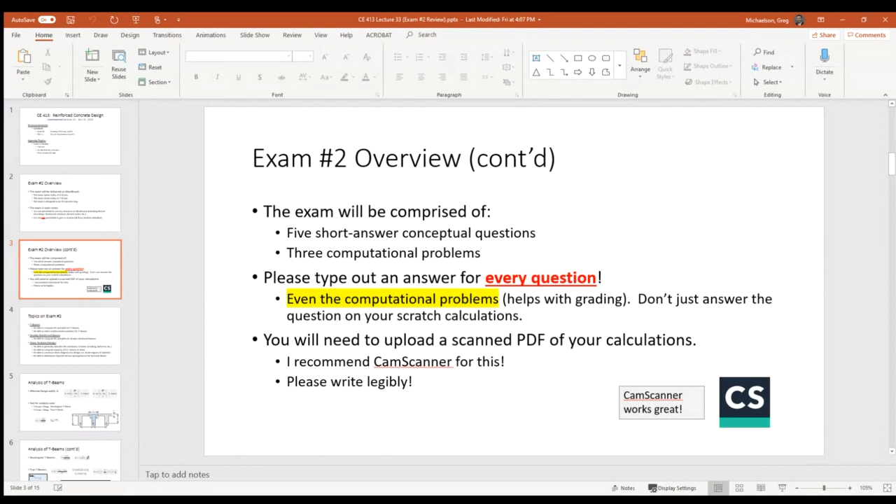Remember, T-beams are known cross-section problems, you don't have to proportion the T-beam, you just have to pick the reinforcement. Same thing with the doubly reinforced section—well, not the same thing, I just want you to analyze doubly reinforced sections.

I don't want you to be able to design them. We never covered design with doubly reinforced sections anyways, and more often than not, it's not something you desperately have to do. So you just need to be able to determine phi Mn and Mn.

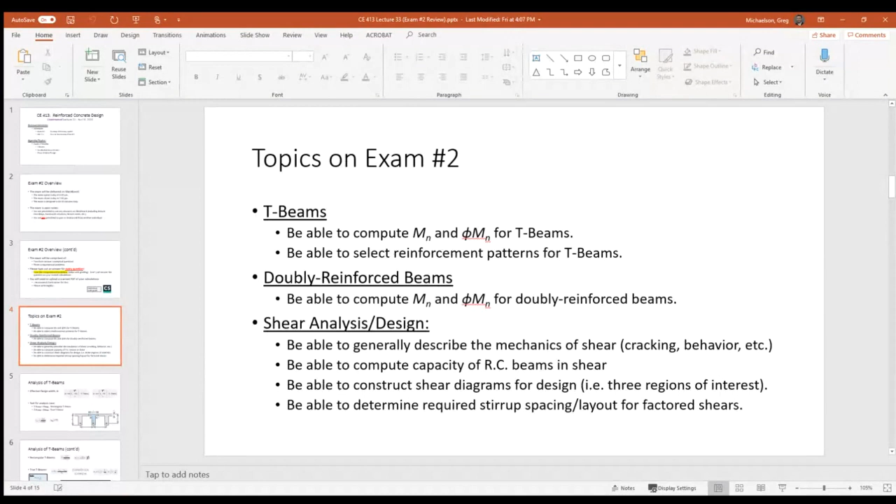Make sure that you can analyze a doubly reinforced section. And as for shear, which is the topic we've done most recently, make sure that you understand shear in general. You can compute the capacity, and you can lay out stirrups and whatnot for beams according to their shear forces.

The rest of the slideshow, I've got a lot of slides, but what I did is I went through all the example problems and put all of the formulas that we sort of derived in class into these slides. I'll take a little bit of time to go through them.

The effective flange width, we have two formulas for whether you're dealing with T-beams in the interior or L-beams if they're on the outside. It's just the minimum of those three quantities. Just make sure that you're cognizant of your units. Beam lengths tend to be in feet, but beam dimensions tend to be in inches. So just make sure that you're using consistent units there.

Remember, with T-beams, we have two different cases that we analyze: whether or not it's a rectangular T-beam or a true T-beam. That's just a function of whether your stress block is completely inside the top flange or if it dips into the web a bit.

Now, if you've got a rectangular T-beam, the analysis is really simple. It's just As Fy, D minus A over 2, to get your moment capacity. And A is the depth of the stress block, same formula as before. The big thing with rectangular T-beams is your B is the effective flange width, B for the top flange.

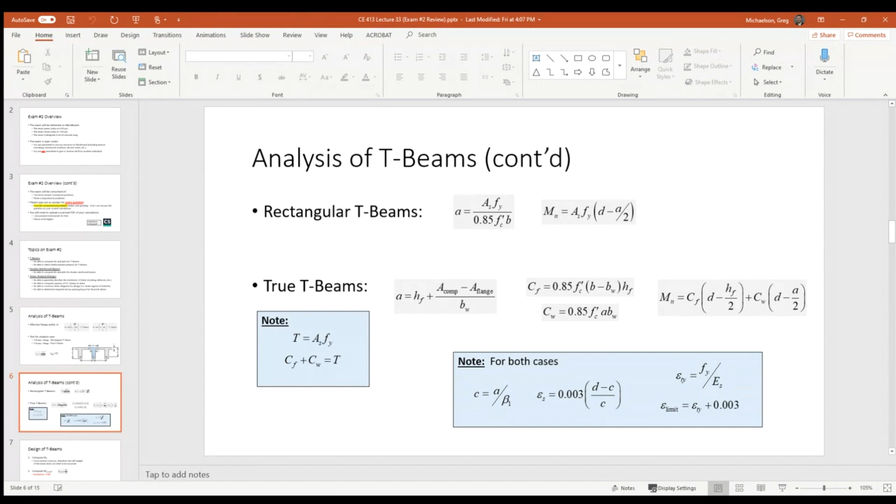For both cases, don't forget we have to determine what phi is, and the way that you determine that is you look at your C value, A over beta 1. You then compute your strain in the steel, 0.003 times D minus C over C, and then compare that against your limiting strain, which is the yielding strain plus 0.003. If the strain in the steel is larger than the limit, then A, your beam meets ACI requirements, and B, it also means phi equals 0.9.

Designing T-beams, these come straight from our previous notes. The first thing we do is compute Mu, the factored moment. Sometimes it may be given to us—we had problems in class where Mu was just given. Sometimes we have to compute it. Remember, we don't have to make any assumptions with Mu because this is a known cross-section problem, so you don't need to assume the self-weight of the beam because you already know what the beam looks like.

You do need to compute Mn required. You have to assume that phi equals 0.9, and you have to assume a rectangular T-beam to begin.

When you design a T-beam, you start off assuming that the beam is rectangular, and you compute the reinforcement ratio assuming it's rectangular, and then using that reinforcement ratio in step 4, you back calculate what A would be if you put that much reinforcement in the beam.

So step 3, you assume it's a rectangular T-beam. Step 4, you immediately test that assumption. If it is a rectangular T-beam, then A will be less than or equal to H sub F, so the stress block depth will be less than the flange thickness, and you can go straight to step 5. If not, that assumption was invalid, and it's a true T-beam, and you go to step 8.

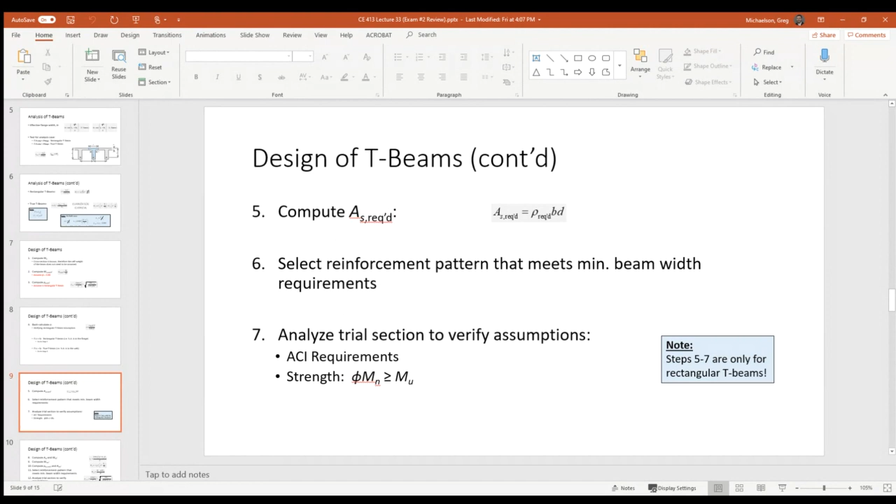Step 5 is really simple. AS is rho BD, select a reinforcement pattern, analyze it. It's that simple. If it's a true T-beam, the analysis becomes a tad more involved.

You have to split it up into your web couple and your flange couple. The first thing you do is figure out the amount of steel required for the flange steel couple, and then the moment capacity of the flange steel couple. Then, if I know the capacity of the flange steel couple, I figure out how much capacity in the web steel couple I need in order to safely resist that load, figure out how much reinforcement you need there, and select a reinforcement pattern based off both ASF plus ASW.

Again, these steps are only required if it's a true T-beam. And again, this is no different than anything we had in our previous notes, I just fit everything into one section.

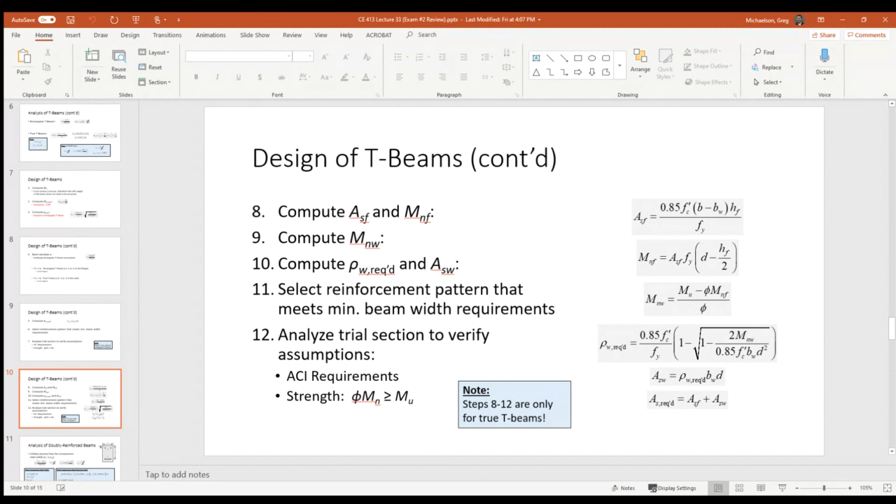When you're analyzing a doubly reinforced beam, the first thing you do is assume that the compression steel yields, meaning the strain is larger than the strain at yielding. You determine what A would be, what the depth of the stress block would be if that were the case, what C would be, and what the strain in the steel would be if that were the case.

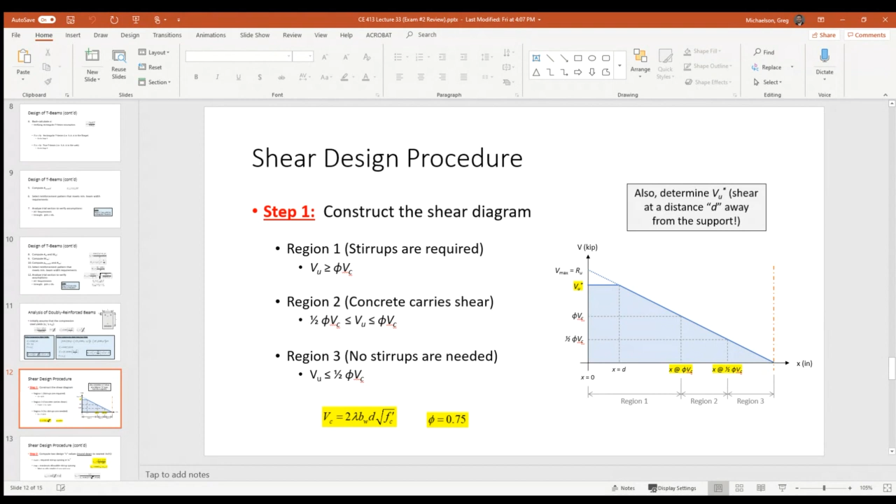We then compute 2 S values for design. Remember, we always round those down to the nearest inch. So if you calculate 5.3, you don't round that up to 6 inches, you round it down to 5 inches. Round down to the nearest inch.

We have our required stirrup spacing at VU star, and then our maximum allowable stirrup spacing. We always compute those 2 values. S max 1 is the minimum of D over 2 or 24 inches, and S max 2 is calculated using that formula there. Now again, it's possible that S max is smaller than S required, and if that happens, just use S max. It just indicates that the beam doesn't have a lot of load on it.

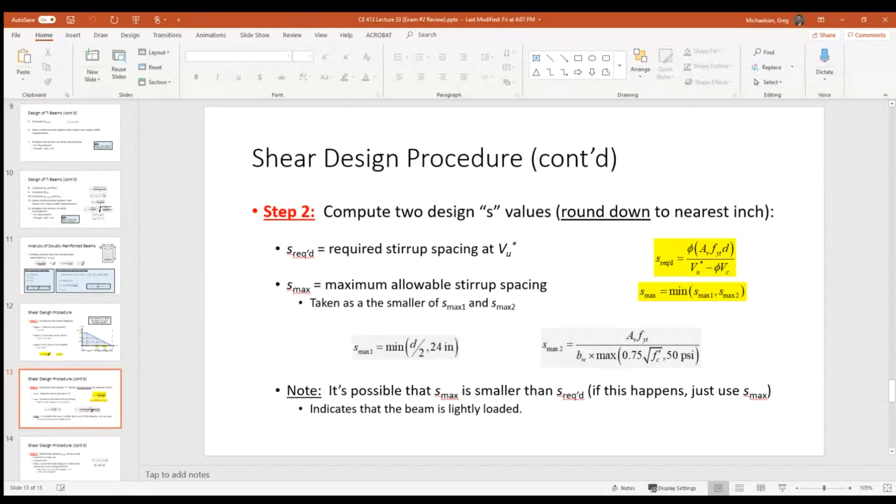It's very lightly loaded. For the procedure for moving on, if you have 2 values of S required and S max, again, this is only valid if S required is smaller. So if you have like an S required of 4 inches and an S max of 10 inches or something like that, we have to determine where we can start using S max. We know we're going to use S required at the beginning, so where can we start using S max?

So using that S max, we compute a VS and then a phi VN, and then we go back to the shear diagram and figure out where that is on the shear diagram. It should occur in regions 1 or 2, most likely in region 1, but hopefully like right before region 2.

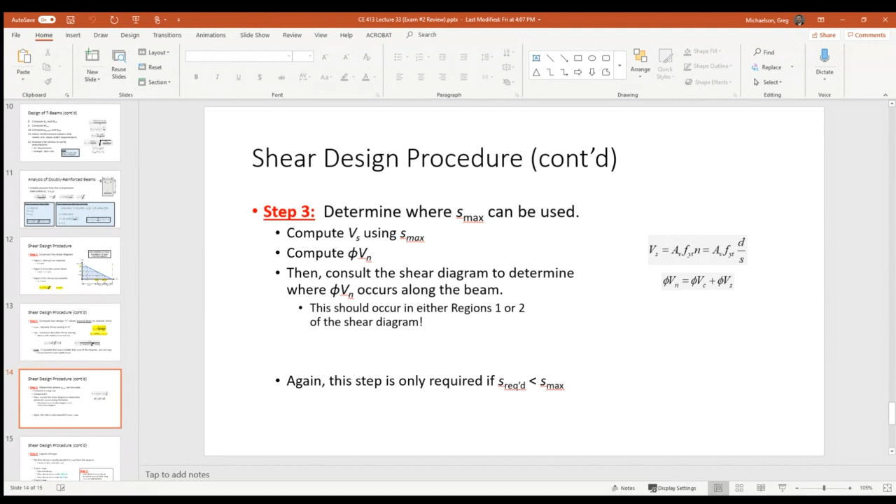Lastly, we lay out the stirrups, and I think this is probably one of the parts where everybody seemed to understand well. You might have had challenges finding the individual distances or the individual values, but the actual laying out part seems like everybody did very well on.

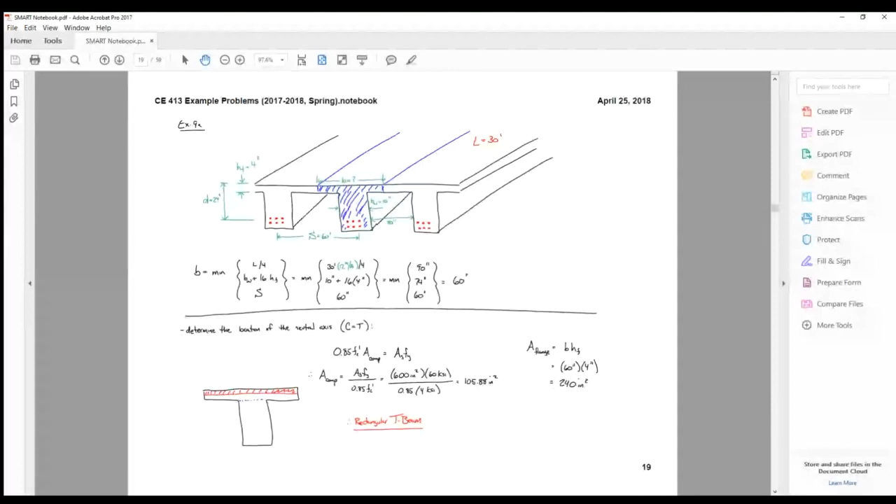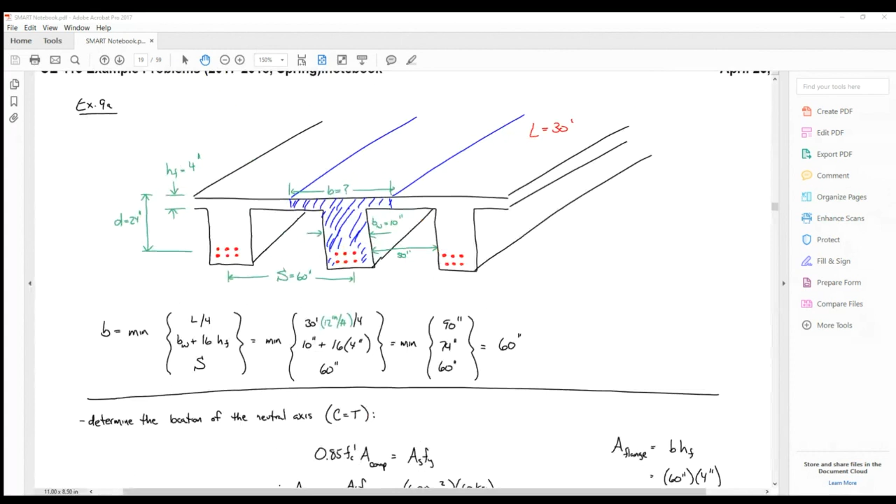Does everybody see example 9A? Okay, all right. So this was a problem that we did in class. This was an analysis problem. So the purpose of the problem was just to do the calculations to determine the capacity, phi MN.

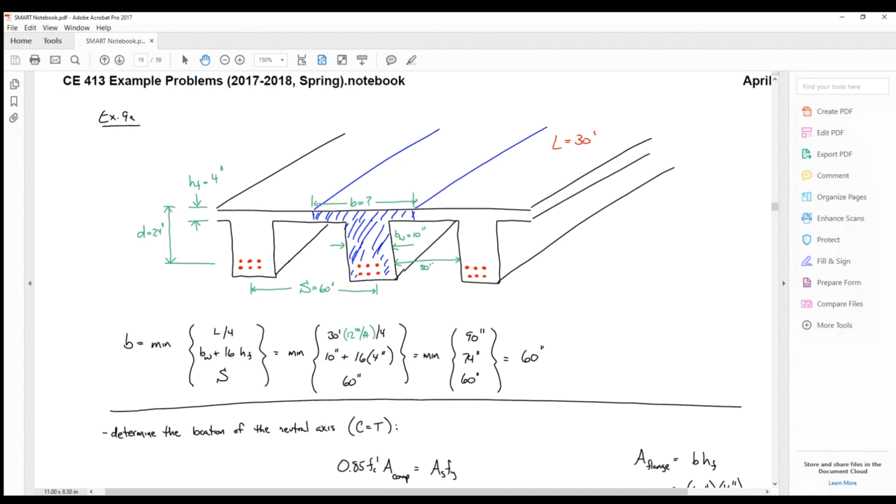So if you look here, here's the T-beam. Part of the purpose of this exercise was to just go through the notation. So it had a flange height of 4 inches, D value, so D was 24.

I'm going to use my cursor to sort of highlight stuff. The girder spacing was 5 feet, or 60 inches. I believe in the problem you were told it had a clear web spacing of 50 inches, so you had to figure out what that value was.

The web width was 10 inches, and so the first thing you have to do is figure out that slice of the segment you can cut out to turn it into a T-beam. So you have to figure out that width, that effective flange width. To do that, first off, plug and chug.

We take the minimum of L over 4, BW plus 16 times HF, or the girder spacing. Now, this is what I was saying, be careful on your units, because the beam length, this was a 30-foot long beam. So this is 30 feet, but all of these dimensions here, like this one and this one, they're in inches.

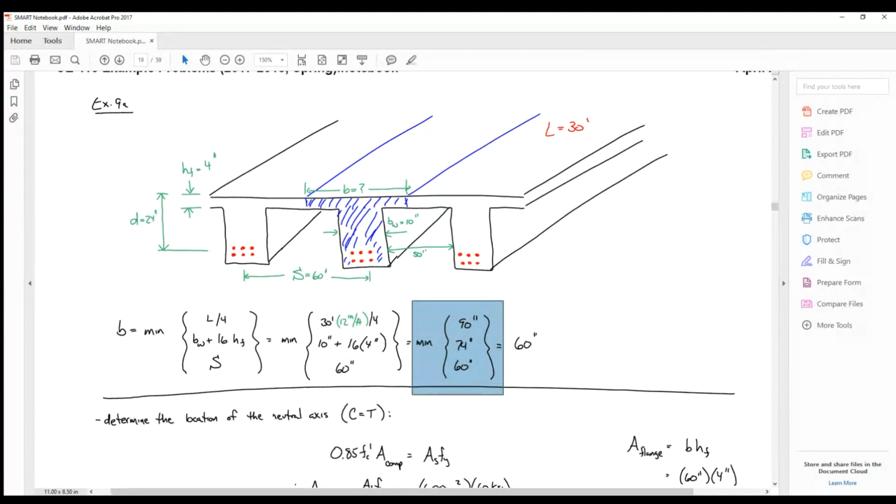So you have to make sure that you're being consistent. Now, when it was all said and done, we had a minimum of these 3 quantities. So the minimum is obviously 60 inches. And then we get to right here.

And this is sort of going to Victoria's question. So we need to determine the location of the neutral axis, and that's what I mean by determining whether or not it's a rectangular T-beam or a true T-beam. It involves computing 2 values: the area in compression and the area of the flange.

Let's take each one of those one at a time. The area of the flange, that's simple, it's just B times H, the total area. So this flange was 60 inches wide, 4 inches tall, so it has an area of 240 square inches.

The area in compression, that's a little bit more involved. Remember, what you're trying to do is determine the depth of the stress block, or the size of the stress block, I guess I should say, which is that magic value such that compression equals tension. So let's start off looking at this expression here.

Compression equals tension. What's the tension? Well, we have tensile rebar in the bottom, so it's just the area of the steel times Fy. So that's the tensile force. The compressive force, remember, we always assume that the stress block has a uniform stress of 0.85 FC prime.

So we have to determine the area of that stress block. We don't know what shape it is, we just need to know the area. Now the area, I solve for this, I just divide both sides by 0.85 FC prime, and I get ASFY over 0.85 FC prime. So if you plug and chug, you get...

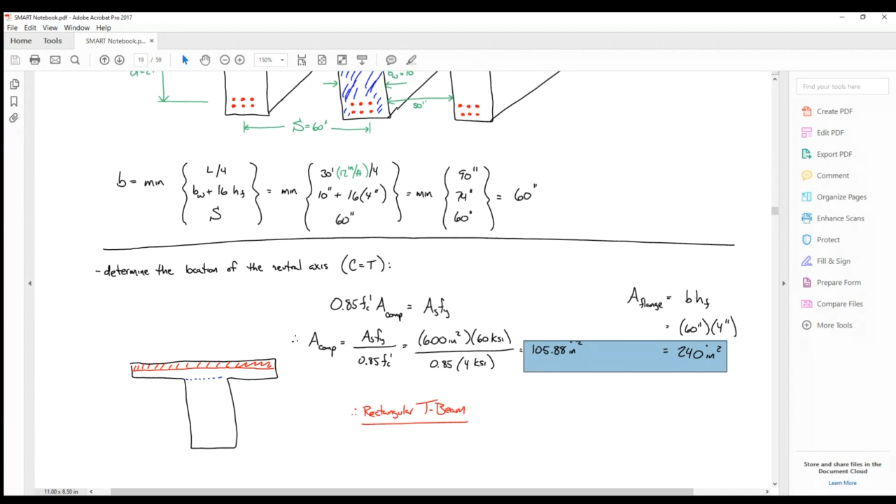The area in compression is about 105.8, 106. So the question is, can I fit the stress block completely inside the flange? And the answer is yes, you can. It's going to look something like this image on the left.

You can see that red hatched region, that's the stress block, and it fits completely inside the flange. So because of that, what does the stress block look like? It looks like a rectangle, so it's a rectangular T-beam.

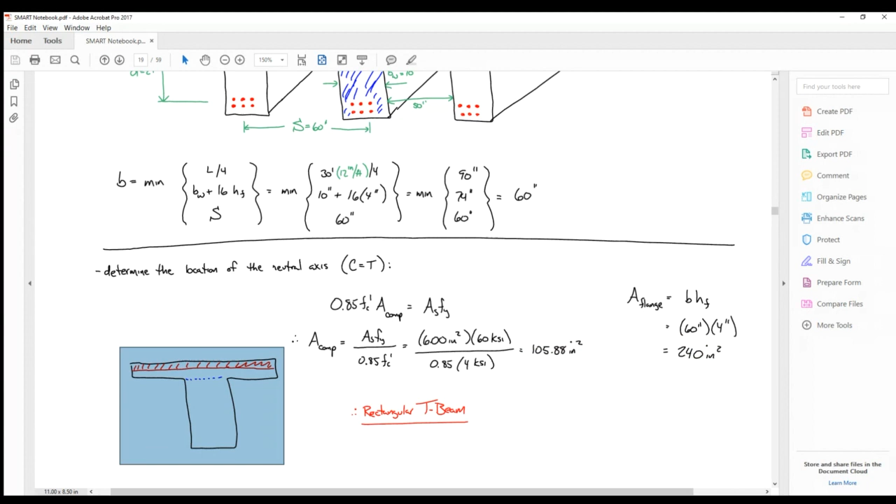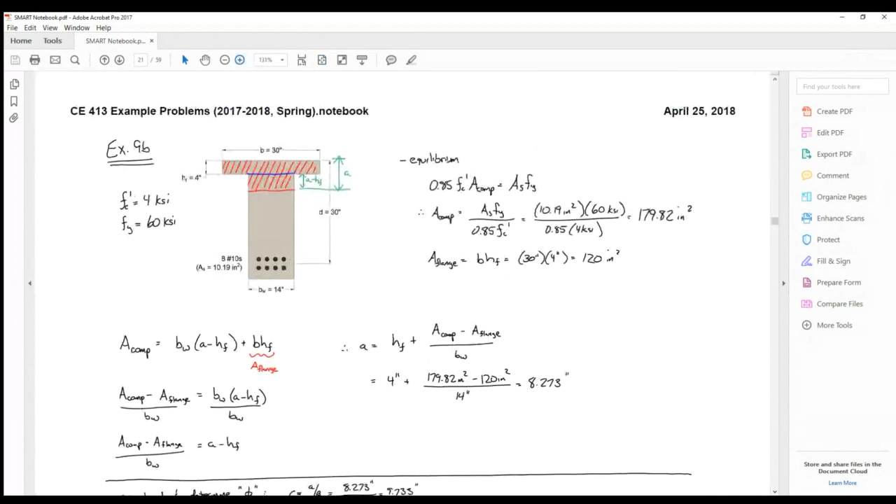Now if you go to a future example, example 9B, you do the exact same calculation. Although here you end up getting a different answer, or a different comparison.

This is example 9B again, trying to do an analysis and look at the two values. We have the area in compression. We do the same math, and it ends up being 179.82 square inches, and then the area of the flange ends up being 120.

So here it's a little different. The flange isn't big enough to completely contain the stress block. So the stress block has to go into the web a little bit. If you look at that red hatched region, the stress block is a T shape.

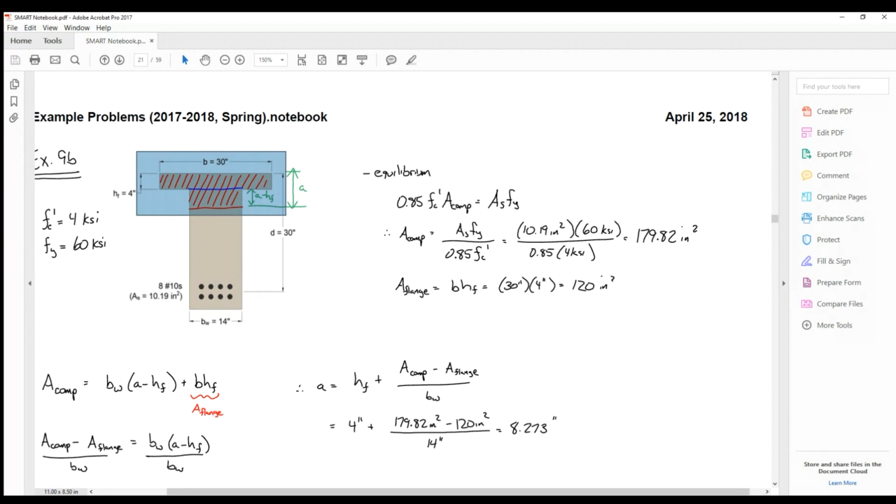It's a true T-beam, because the stress block looks like a T. Okay, so that's how you determine the difference between whether or not it's a true T-beam or a rectangular T-beam from an analysis standpoint. From a design standpoint, it goes basically to right here.

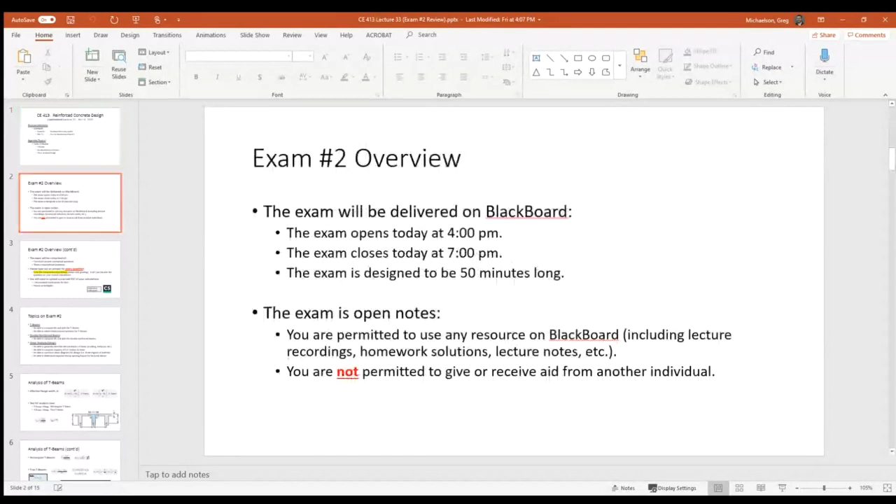So for design, whether or not you're dealing with a rectangular T-beam or a true T-beam is determined in steps 3 and 4. In design, you know what the T-beam looks like, the physical dimensions of the beam. You just don't know whether to analyze it as a rectangular T-beam or a true T-beam, and you certainly don't know that because you don't have any reinforcement.

There's no rebar because you have to figure that out. So you start off by computing MU, and then you figure out how much MN is required, the strength of the beam required, assuming phi equals 0.9. Then you get into the guts of your design, starting off assuming it's a rectangular T-beam.

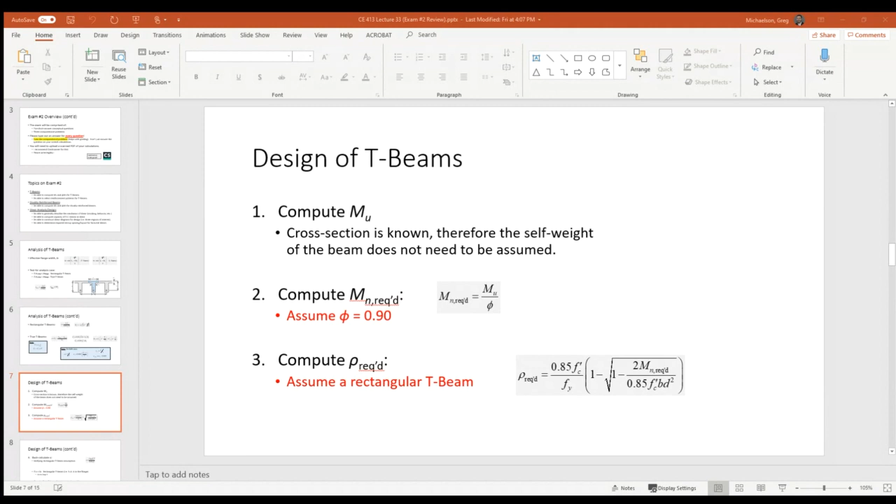In step 4, we immediately verify that assumption. We ask, what if we took that much reinforcement and put it in the beam? Step 3 tells us how much reinforcement we need if it's rectangular. Step 4 says let's put that much reinforcement in the beam and ask, is it rectangular or not? So we back-calculate A, trying to verify that assumption.

Now remember, what is A? A is the depth of the stress block. So if A is less than the thickness of the flange, it's rectangular. If it's greater than the thickness of the flange, then it's a true T-beam. That's how you figure it out in design.

I know that was a little bit of a long-winded answer, but I wanted to make sure I was clear. Did that answer your question, Victoria?

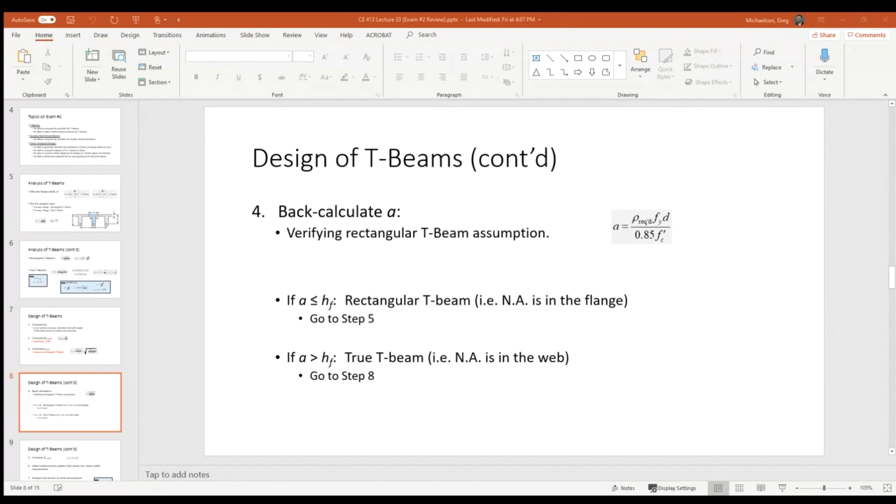Does the L-beam you mentioned differ from the T-beam other than B? No, the only thing that's different is the formula for B. Everything else is completely the same - the analysis protocol, the design method, every step, nothing changes. Just that formula.

And again, it's just because it's the beams on the outside. It doesn't change the fact that it is a beam with a flange on top of it. It's just that the flange has different dimensions.

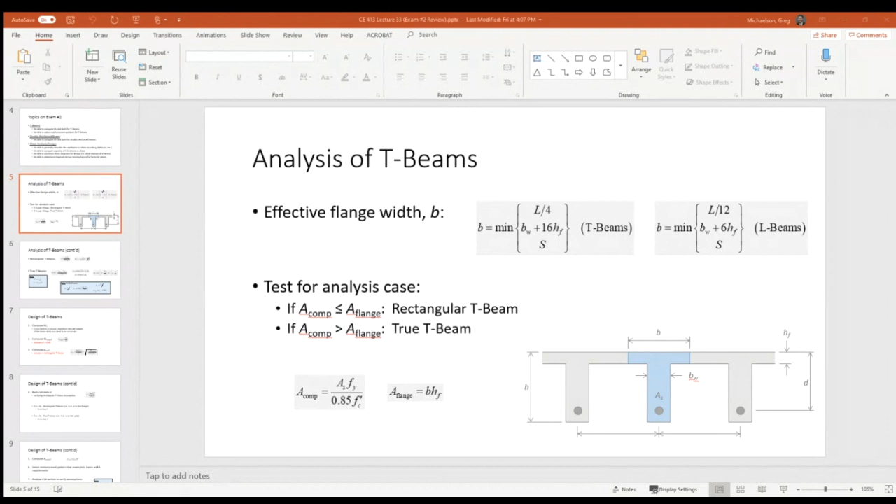All right, so here's the example. These calcs are from a couple years ago, but the math really hasn't changed all that much. In fact, I don't think it's changed at all. So we had a beam with a uniformly distributed load.

It has 4 KSI concrete, 60 KSI steel. It's 16 inches wide, 25 inches effective depth. This beam had a lot of load on it: 11.5 kips per foot distributed load. I mean, that's a lot, that's 11,500 pounds every foot. It also was 20 foot long.

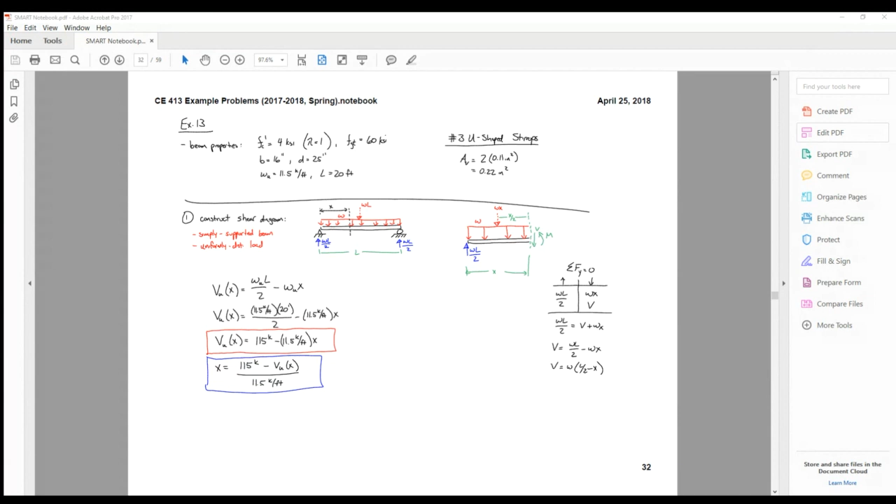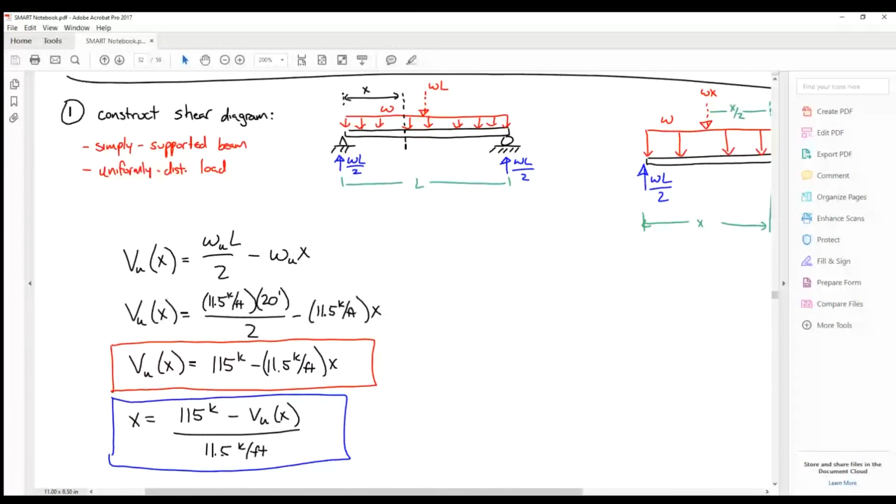Now, first thing I have here in the slides, again, I wouldn't totally require you to do this on the exam, but this is something that should be within your abilities. So it's a distributed load, so the reactions are WL over 2.

You cut a section, look to the left. So you can see I cut a section right here, and then I look to the left. So if you cut a section and look to the left, that looks like this right here.

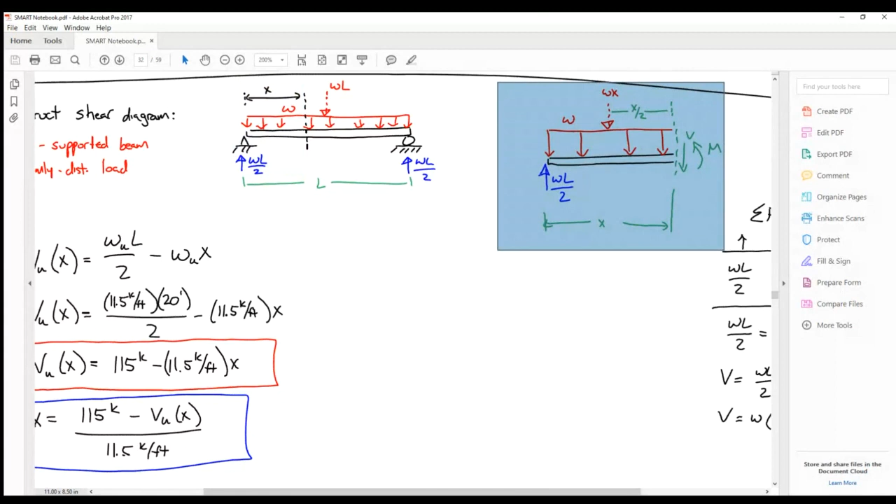And then if you sum forces vertically, what do you have? You have WL over 2 going up, and then what do you have going down? You have WX going down, and you have V going down. So WL over 2 going up, WX and V going down.

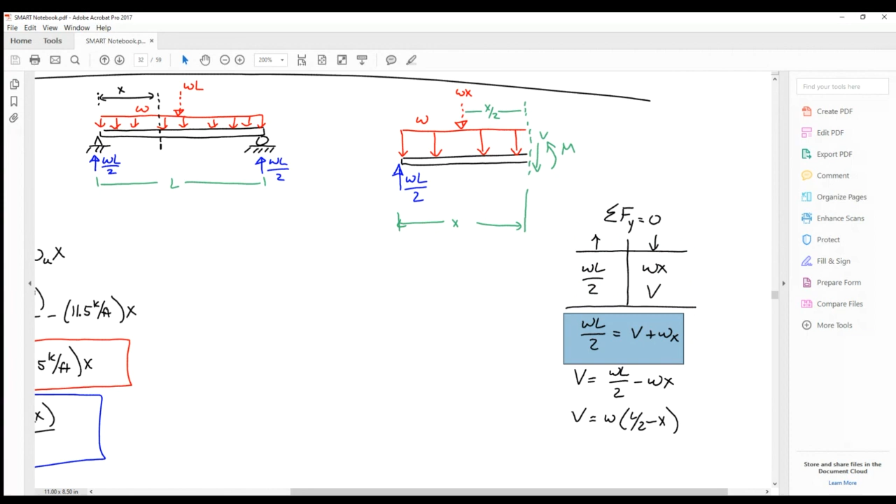So this is your expression, solve for V, and here's what you get. So this equation for shear and this equation right here are the exact same, it's just plugging the values in. So this, WL over 2 is 115 kips, and then W was that. And so those are your two expressions for the shear diagram.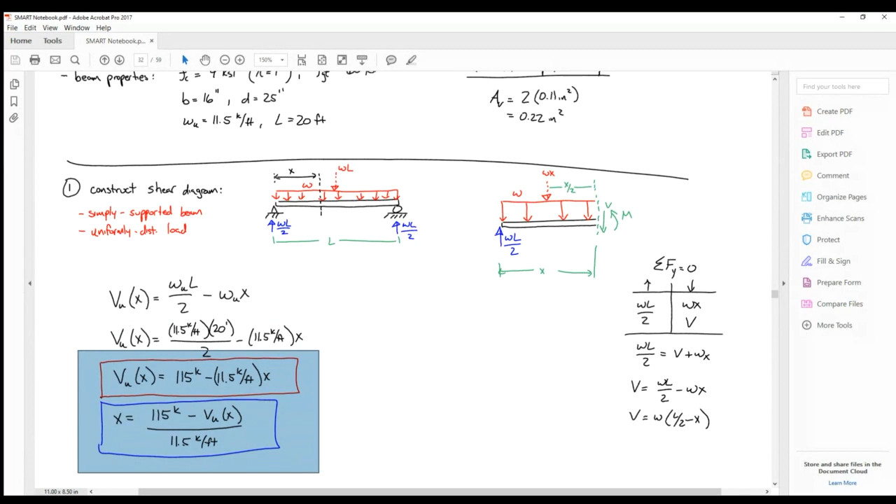In order to plot the shear diagram, we can draw a quick and dirty one pretty easily, but we need 3 values for the plot. We need VU star, we need X at PVC, and we need X at half of PVC. And so Vc is 2 lambda...

BD square root of FC prime. Remember, square root of FC prime, you put in PSI, you get out PSI. And so this comes out to be about 51,000 pounds, or 51 kips.

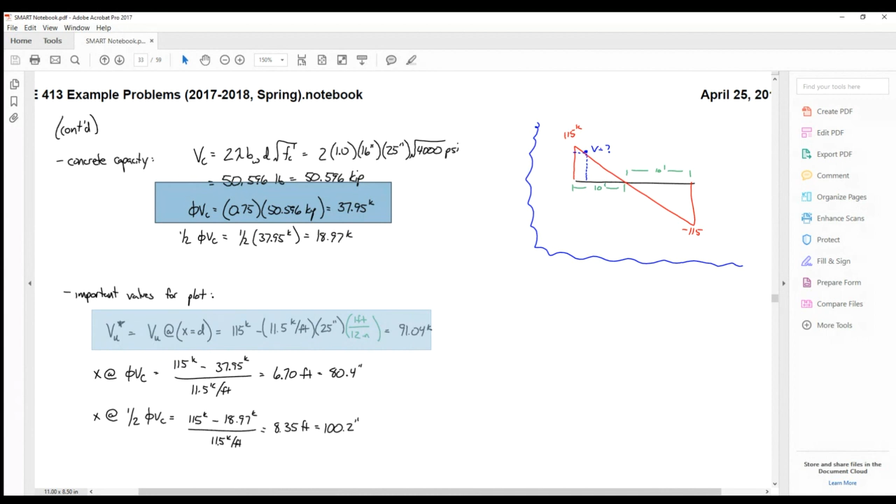phi Vc is 0.75 times that, and then half of phi Vc, take half of that. VU star, that's the VU at X equals D, so plug in D in the expression before. Don't forget to convert that to feet to make sure that your units are consistent. And then X at phi Vc and half of phi Vc, respectively.

So this is your shear diagram. You can see we have this linear region, so you can see how it trails down like a line. That's just your raw shear diagram. Remember though, our shear diagram starts at VU star for design, so that was like 91 kips.

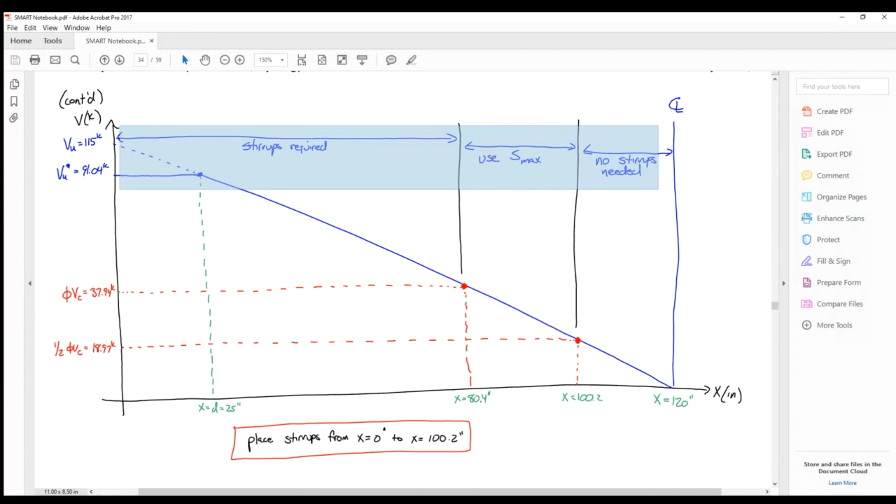We need, stirrups are required everywhere between the support and phi Vc. That's region 1. Region 2 goes to half of phi Vc, and region 3 is out to the end. So this is the region where we require stirrups, this is the region where we should be using S max, and this is no stirrups at all.

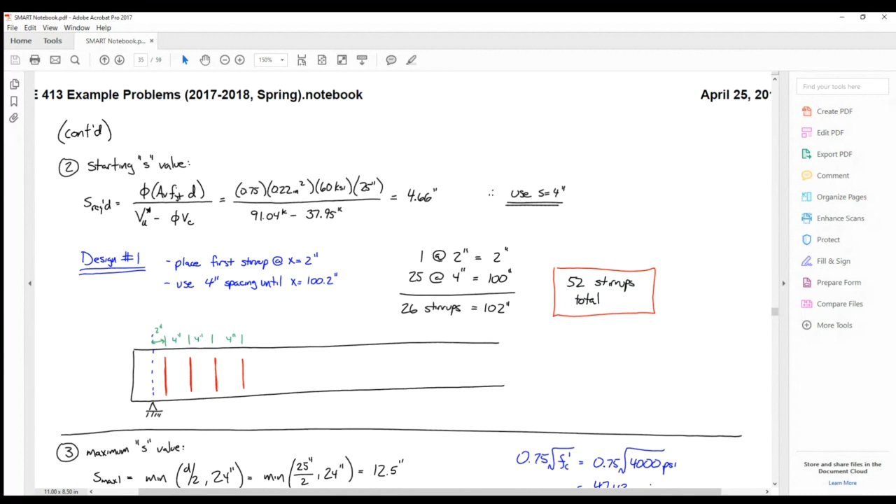Next, now I formatted my steps a little bit differently here, so bear with me. When I was doing the calcs a couple years ago, I went through and demonstrated how with more increments of stirrup spacing, you were able to decrease the number of stirrups. So you can sort of ignore this part here, this design 1, I won't make you do that in class.

Really, for our purposes, what you need are 2 S values. You need an S value that's required at VU star, which ends up being 4 inches. Again, you compute 4.66, you round that down. Remember, whenever you compute an S value, you round it down, not up.

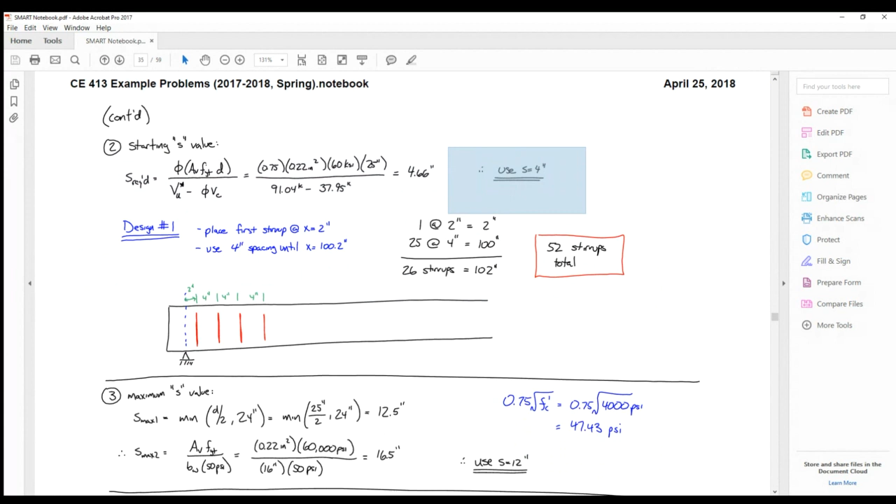Next, we need a maximum S value, so S max 1 and S max 2, plug and chug, and this is the S value that we get, which is 12.5 inches, but again you round that down. So you have an S of 4 inches and an S of 12 inches.

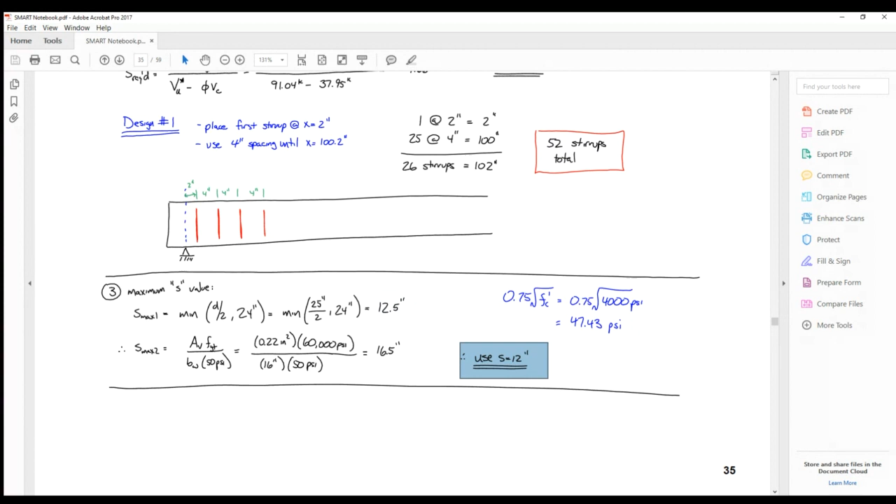Next, you determine where you can start using S is 12 inches, so start off with VS. VS gives you 27.5 kips, assuming that S is 12 inches. phi Vn is 58.6 kips, and so where does that occur on the shear diagram?

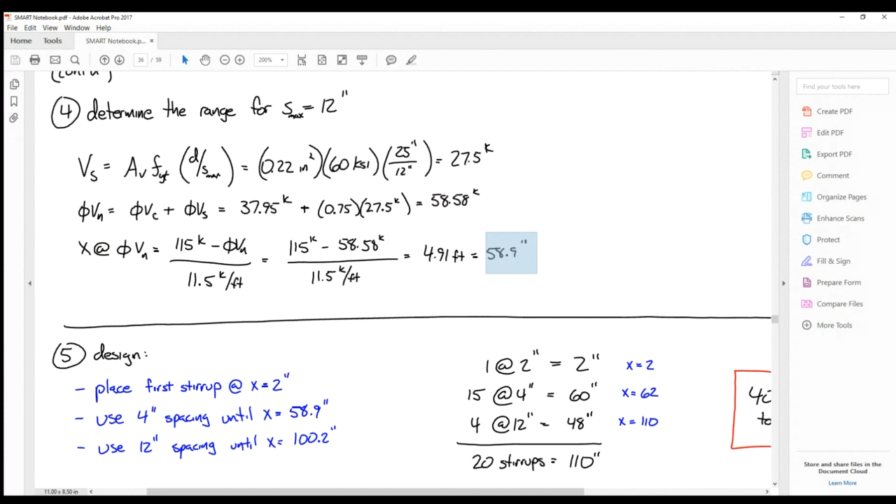It occurs at around 4.91 feet or 58.9 inches. So what do we place? Our first stirrup at X equals 2 inches. We use 4-inch spacing until we get to right here, and then we use 12-inch spacing. We get to half of phi Vc, and so that would be our answer.

That's really all I'm expecting of you for this exam and really for this class. The only thing I do in class to improve on this is, if you look at the example, we're really only using 2 increments: 4 inches and 12 inches. Well, what if I threw something in the middle, like 6 inches? See how I've got 20 stirrups on the beam, or 40 stirrups total? Instead of 40 stirrups total, maybe if I threw another increment in between, I could reduce the number of stirrups.

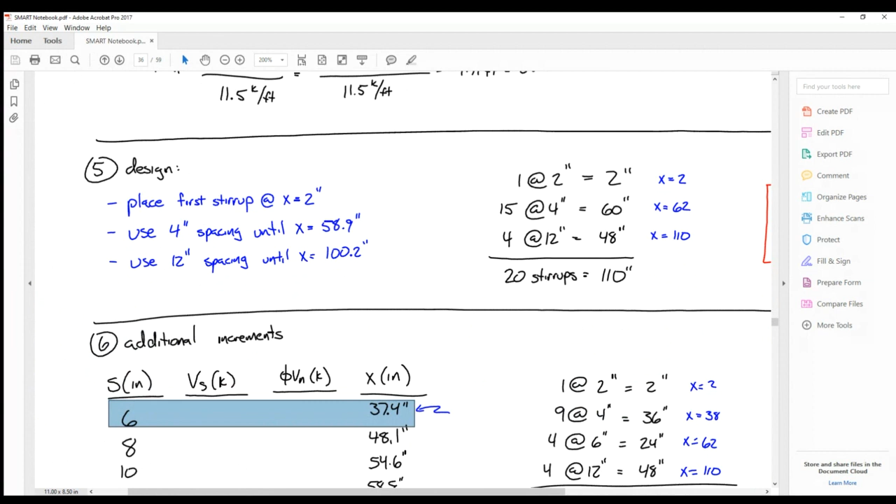So what I did in class is I said, well, what if I tried S equals 6 inches? And if I use S equals 6 inches, I repeat what I do in step 3, and I end up getting that value of 37.4. So I do it again, and I'm able to shave off a couple stirrups. Again, to be absolutely crystal clear, I'm not going to make you all do that on the exam. I just want to show you that's what we did here.

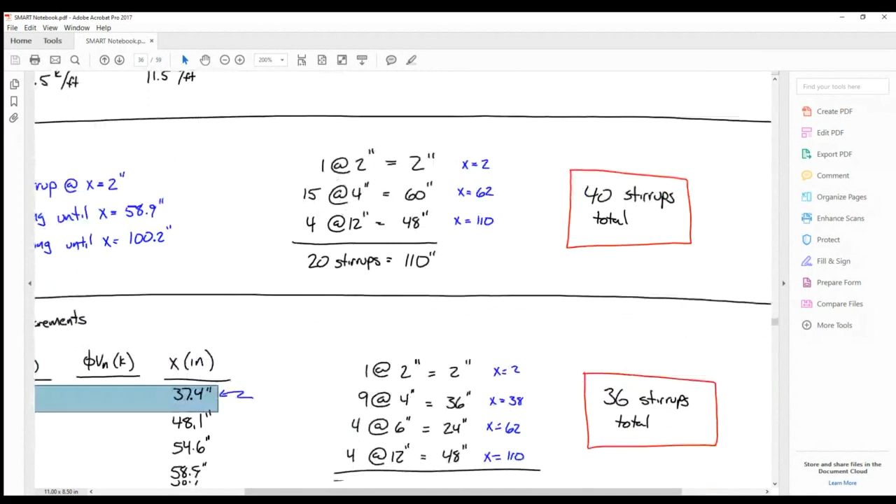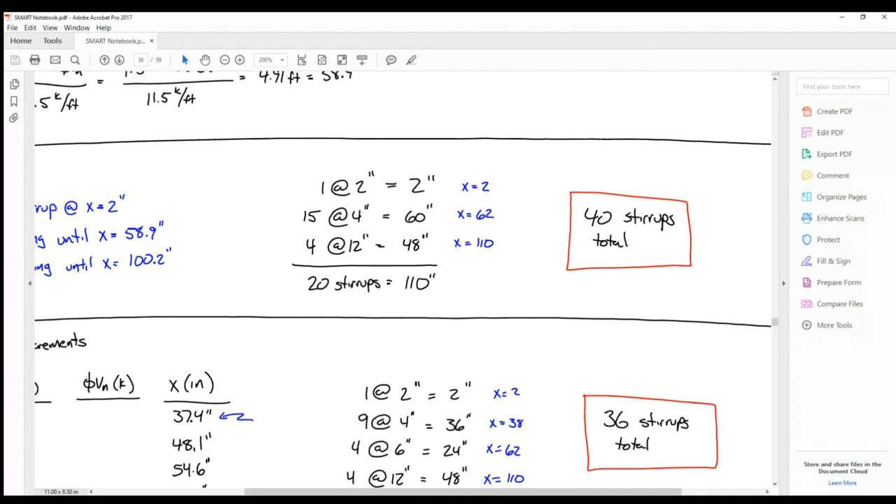I'm going to be honest with you, I don't remember if we did this in class a couple weeks ago with canceling lectures. I don't know, I don't remember. So that's why when we came back after break, I said let's just do another distributed load example to make sure we're on the same page. Again, that right there is where I expect you to stop.

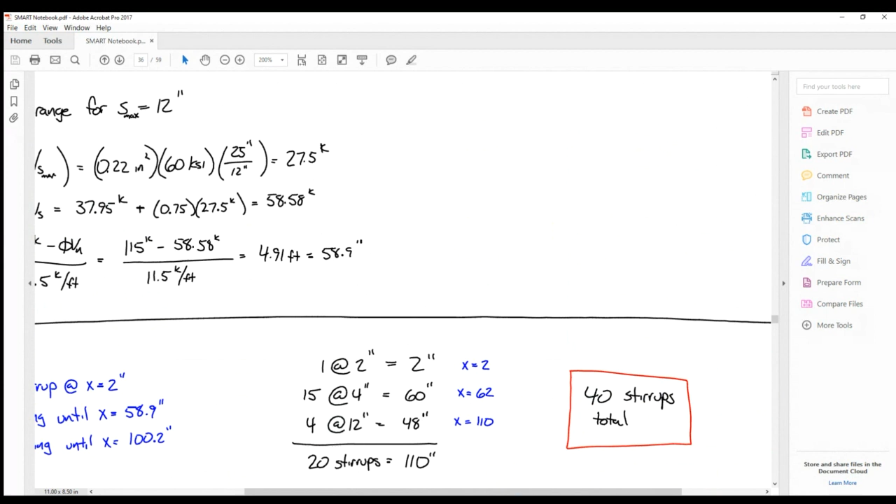Now, did I cover what you wanted, or was there anything specific? Why do we round down S values? Okay, great question, why do we round down S values? The reason why we round down S values is because of this equation right here.

Okay, so let's take a look at this equation. This equation tells you the shear capacity provided by the stirrups. Remember, how does a reinforced concrete beam resist shear? Well, it resists shear 2 ways: the shear capacity provided by the concrete, the VC, the 2 lambda BD square root of FC prime, and then the capacity provided by the stirrups. That's why you're putting stirrups in the beam, because you need stirrups, since the concrete beam isn't enough. Now here's the expression.

How do you compute VS? You take AV times FY times the quantity D divided by S. So S is in the denominator, keep that in mind. Now, let's say you do some math and you find that a beam needs a stirrup spacing of 5.3 inches. So let's say that you compute S equals 5.3.

If you round that up to S equals 6 inches, what happens here? If you have an S of 5.3 and you round it up to S equals 6 inches, what happens to your VS value? VS goes down, right? Higher denominator equals lower VS, which equals lower capacity. So the conservative thing to do, and what makes sense from a capacity standpoint, is to take that S value and round it down. That's one way of looking at it, is to look at the math, but let's also look at the physics of it.

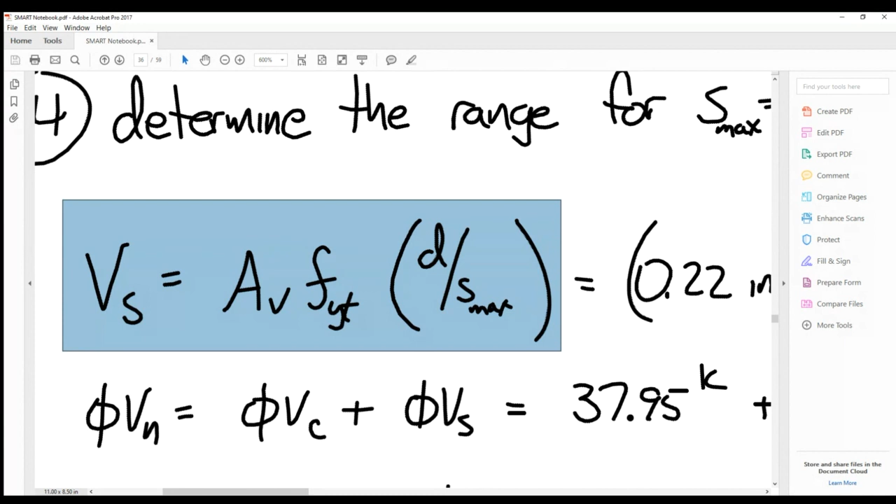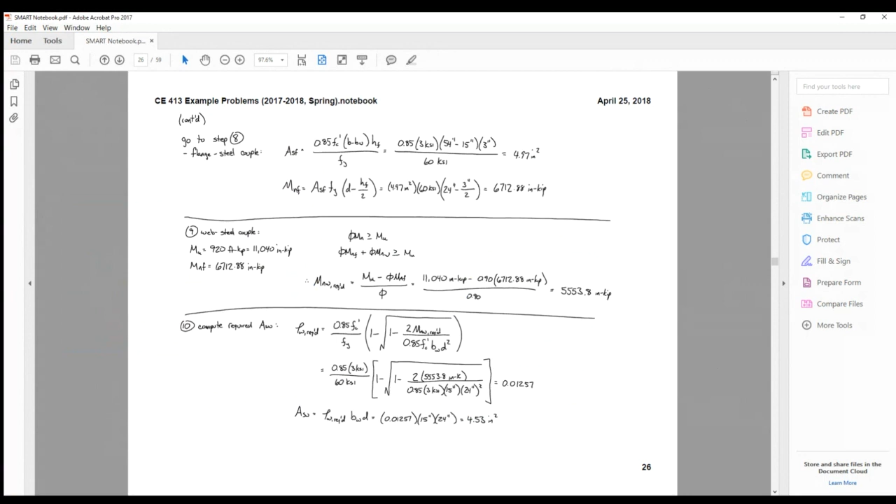Can we quickly review laying out stirrups? Are you talking about... Oh, my screen froze, hold on. Are you talking about this part right here? Like assuming that this was correct, that this is what we needed? Like you can get to this part, and then it's like, okay, get from this part to this part.

Let me try something. All right, so give me 1 second.

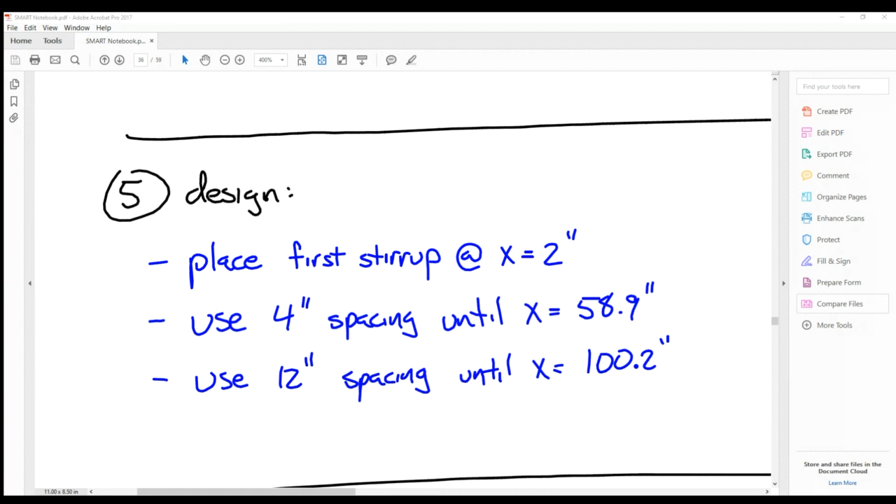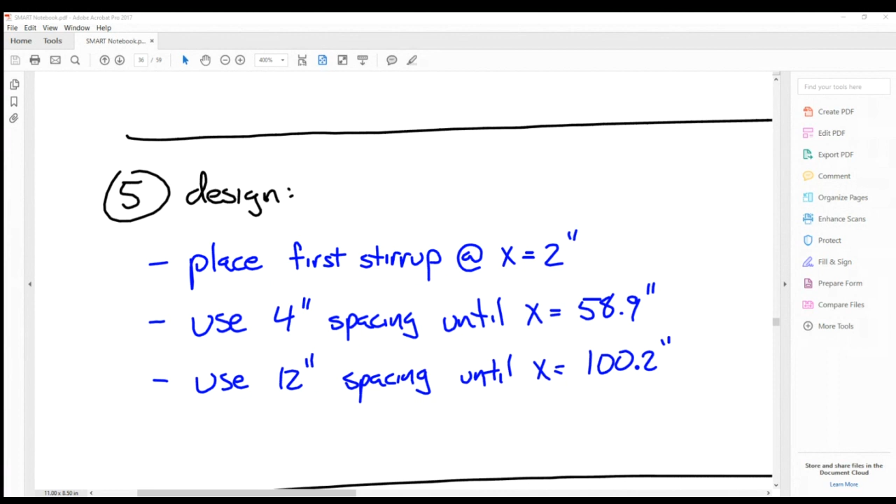While I'm getting ready for this, let me see if I could walk and chew gum, so if you need me to answer another question. Hold on. Stop sharing.

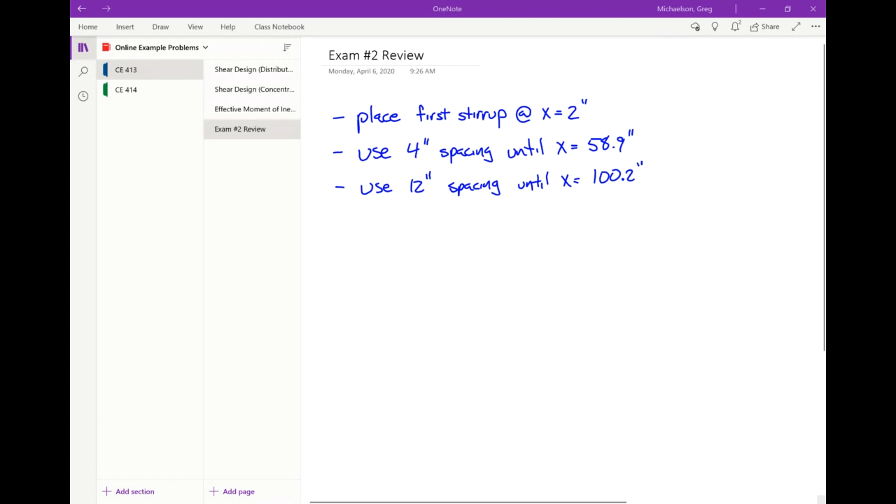Okay, so you're talking about going from this to a layout, am I correct? And if you need to turn on your audio, that's fine. So let me show you how this works, okay? Now, hold on.

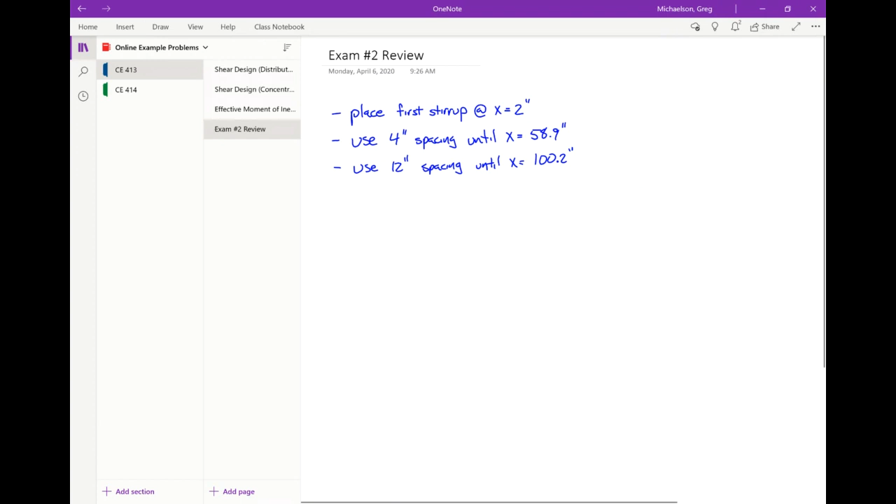Okay, so here's the beam, right? So we place our first stirrup at x equals 2. To be clear, at the support, this is x equals 0. So what I'm going to do is place my first stirrup here. So I've got my first stirrup, and that is

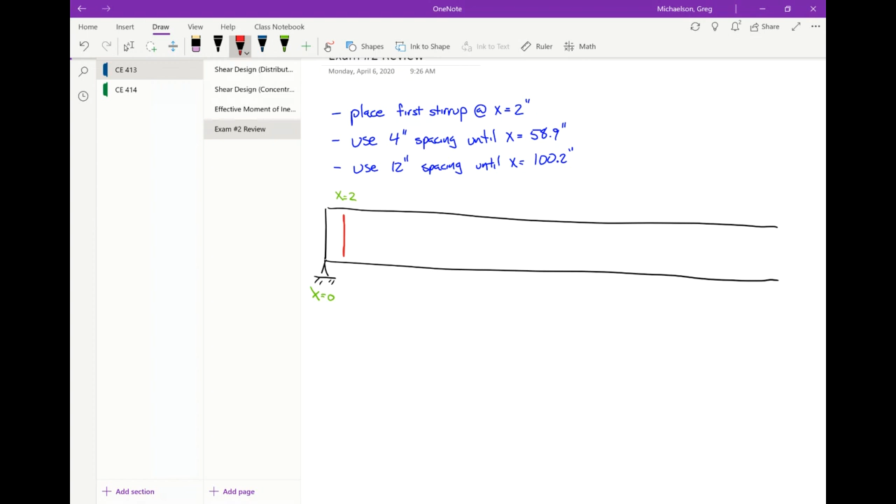at x equals 2, okay? Now what I'm going to do is start placing stirrups at 4 inches. Let me just sort of draw that out. 1, 2, 3, 6. Okay, all right. I'll just draw a few of them to kind of explain. Just think of this like it's a graph, like you're graphing values.

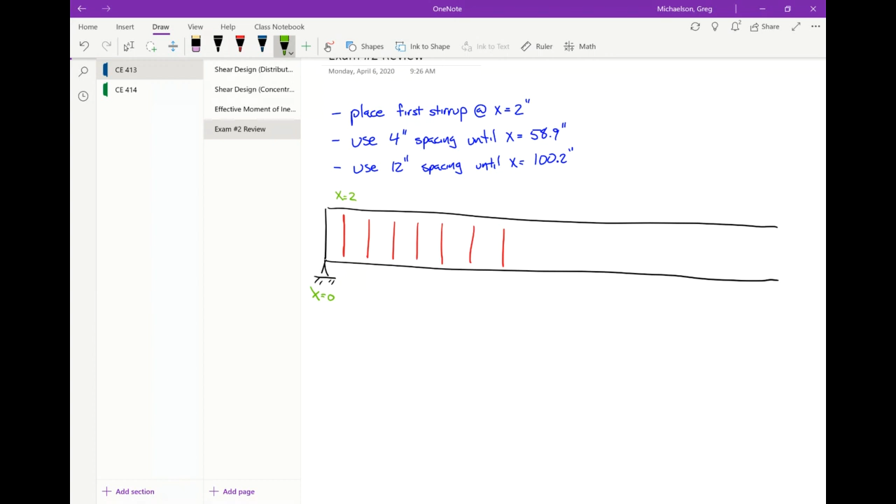Okay, so this is x equals 2. So if I put my first stirrup down, again, I'm using 4-inch spacing. So if I'm at 2 inches and I go out 4 inches, that's x equals 6. And so this one's going to be x equals 6 plus 4, which is 10. This is x equals 14, 18, 22, 26. Follow me so far?

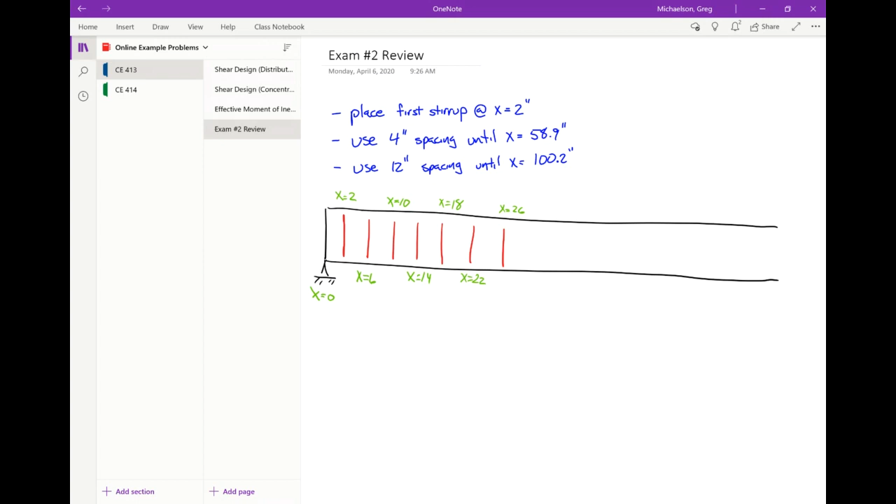You follow me so far, Isaiah? Okay. All right. So let me put this in a table so that we're clear on this. So using 4-inch spacing.

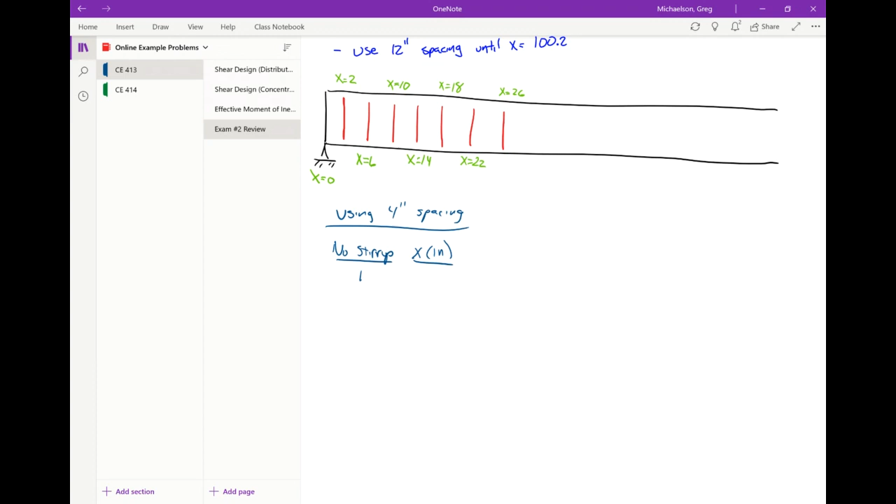Would you agree that the first stirrup got me to 6 inches? The second stirrup got me to 10 inches. Third got me to 14. 4 got me to 18. 5 got me to 22. 6 got me to 26. See what I'm doing?

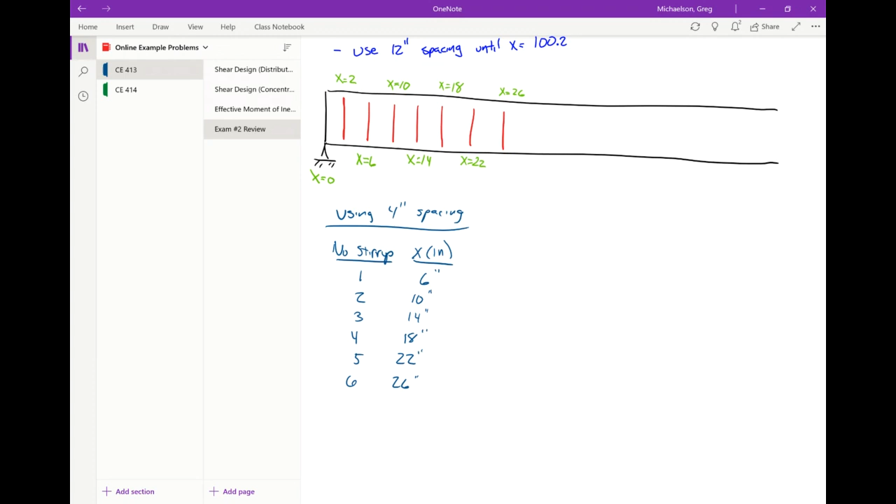Now, remember, our goal is to get to 58.9. At least at or past 58.9.

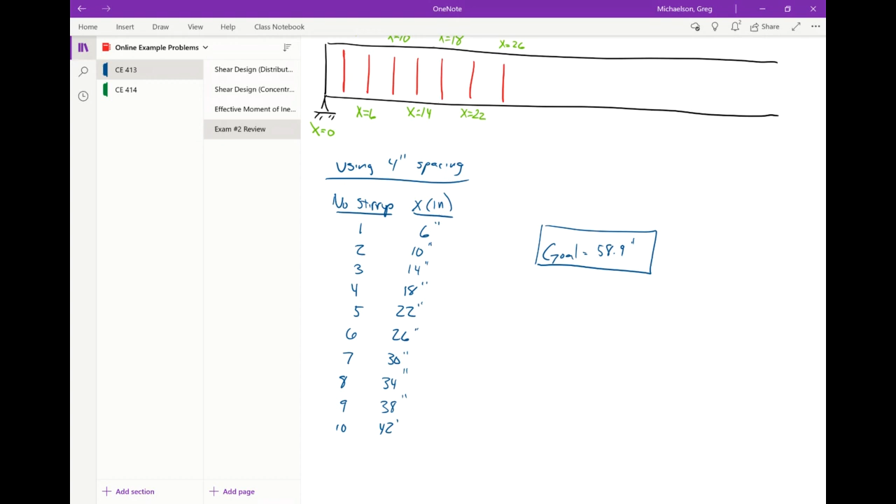So we keep going. So 7 would get me to 30. 8 would get me to 34. 9, 38. 10, 42. 11, 46. 12 is 50. 13 is 54. 14 is 58. Now 14 isn't enough because we have to get past 58.9, so we need 15 to get us to 62.

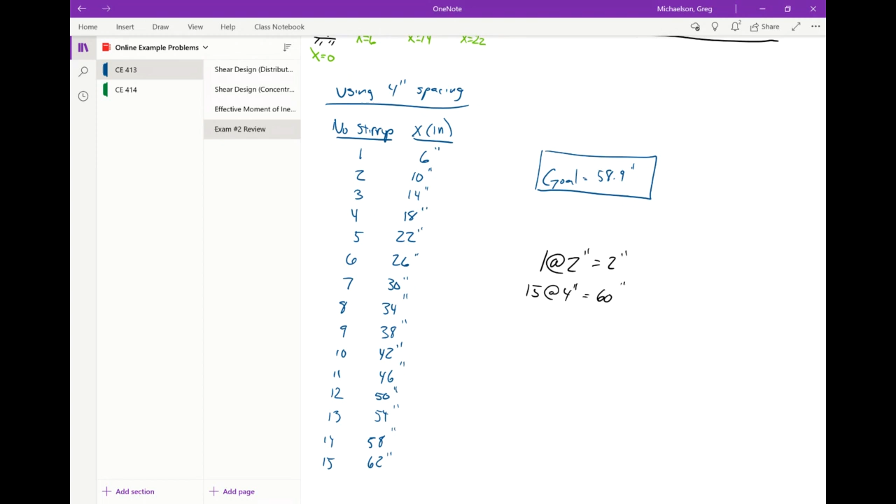So that's why what we do is we say, okay, one stirrup at 2 inches is 2 inches, and then we said 15 at 4 inches gets us to 60. Because 15 times 4 is 60. And we just do the same thing again with 12-inch spacing until we get to 100.2.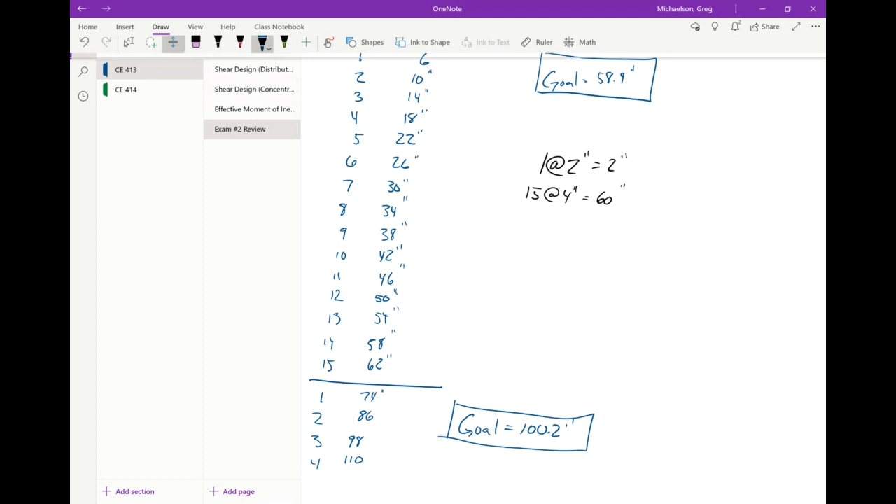So from here, we would use 12-inch spacing. So our first stirrup, if we're at 62 and we go 12, that's 74. 2 was that 74 plus 12? What is that? 86. 3, 98, and then 4 gets us to 110 because we had to get to 100.2 inches. So that's why we do 4 at 12 inches, which is 48. Did that answer your question?